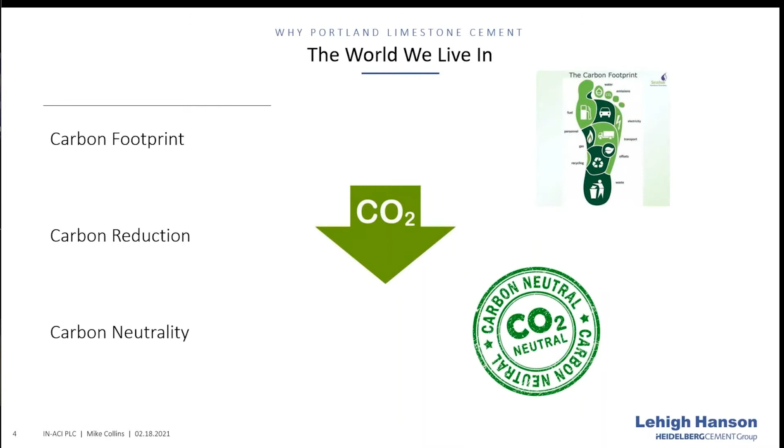We have to address it individually as people that live in this world, but we also have to address those kinds of things from a business standpoint, and it's going to become more prevalent as we work through our days. So I did a quick Google search this week and typed in carbon footprint. I got 5,050,000 hits in 0.42 seconds. Kind of blew me away.

Just a couple of examples from that search: the Wall Street Journal, airlines push to reduce carbon footprint with greener fuels. The BBC News, calculate the environmental footprint of your food, something I'm really not interested in doing today. And in the United States, we've got a new administration that promises in their first 100 days to jumpstart the whole climate change agenda.

So those things, carbon footprint, carbon neutrality, carbon reduction, they are a part of the world we live in. For us as a company, and when I say us, I'm talking about Lehigh Cement, but also as an industry, a way for us to begin to get our hands around carbon reduction is to let that be something that we use Portland Limestone Cement for.

I work for Lehigh, been with Lehigh almost 33 years. Lehigh is part of the Heidelberg Cement Group, and Heidelberg is very serious about this. From a 1990 baseline, they established that initially by 2030 we would see a 30% reduction corporately in our CO2 output. That has now been ramped up, or cut down, to 2025. And now the ultimate goal is by 2050 that we would be a carbon neutral company, realizing the vision of carbon neutral concrete at the latest by 2050.

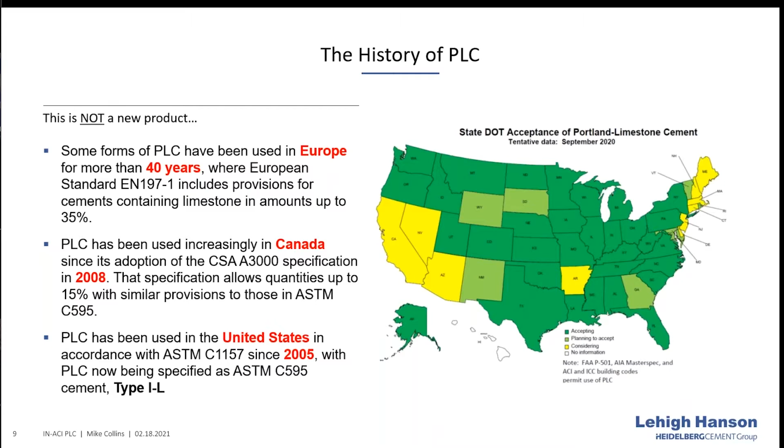Here on the right, you can see the map of state DOT acceptance of Portland Limestone Cement. If I'd thrown that map up there around 2012, it had a lot of yellow on it. More now you start to see states embrace this product because the flat out truth is it works. We're going to talk about that over the next several minutes.

As we talk about how it works, let's get into the mechanisms of PLC a bit. To understand how PLC works, we need to look at how it's made. As I briefly mentioned, Type IL is a blended cement, covered under ASTM C595 and AASHTO M240. Under those specifications, it's allowed 5 to 15% limestone by mass.

This next point is something I want to make sure everyone understands, because it's the question I routinely get. Portland Limestone Cement, our C595 cement, is very typically made from the very same clinker as the C150 cement from that same cement plant. The only difference is that PLC has about 6% roughly more limestone. A key is because it's a blended produced cement, it's designed for equivalent performance, and we're going to talk about that a bit.

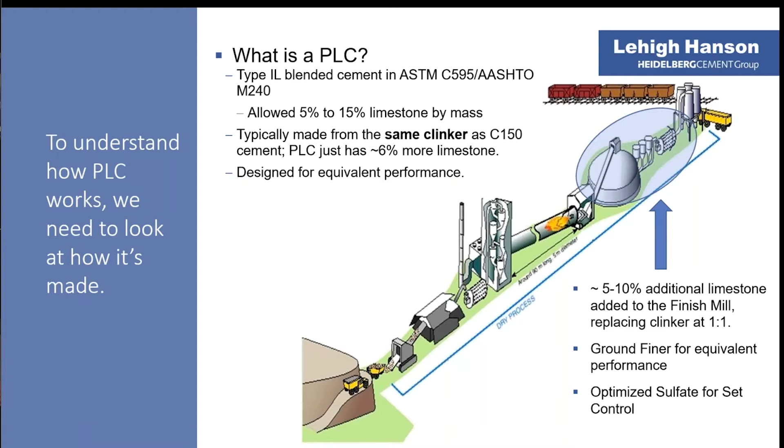And the cement is a part of that. The sulfate that the cement brings to the system is really tasked with controlling a lot of the reactions that take place once hydration begins. We're able to optimize the sulfate content on our end as a cement producer when we make that 595 cement.

And we're concrete guys for the most part, not always cement guys. So when I start thinking about things like particle size distribution, I look at aggregate gradation. If I have a gap in my aggregate gradation, I can often blend in a third aggregate, maybe a pea gravel, and that's going to increase workability or increase strength. It could reduce my water content, whatever it may be in that particular aggregate situation.

So some things that start to happen: we see an enhanced particle size distribution, so that cement typically would make a denser concrete. That leads to reduced porosity. One of the things I think limestone cement has battled over the years is that people think the limestone is inert, just kind of a filler material, and that's actually not correct.

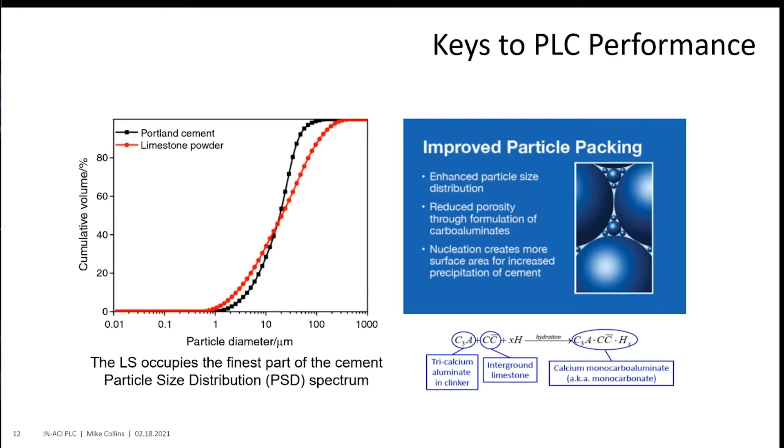So some advantages of PLC — what does PLC do for me? Well, the primary advantage is that it allows for a reduction in CO2, typically something up to 10%. Let's start to hang some numbers on that. In the United States, from the years 2012 to 2018, there were 4 million metric tons of PLC used in concrete.

What does that mean for us in terms of CO2 reduction? That was 325,600 metric tons of CO2 savings in that same time period.

So what does that mean? Well, that's equivalent to 70,344 passenger vehicles driven for a year — that's the equivalent CO2 output. So that would be the same as if we took 70,300 cars off the road. We've saved that much CO2.

That's enough CO2 that the energy used could have powered 37,500 homes for one year. And that's also the equivalent CO2 that's sequestered by 425,000 acres of U.S. forest for one year. I throw all those numbers at you because I think we need to hang some everyday data on this, to show why this is important.

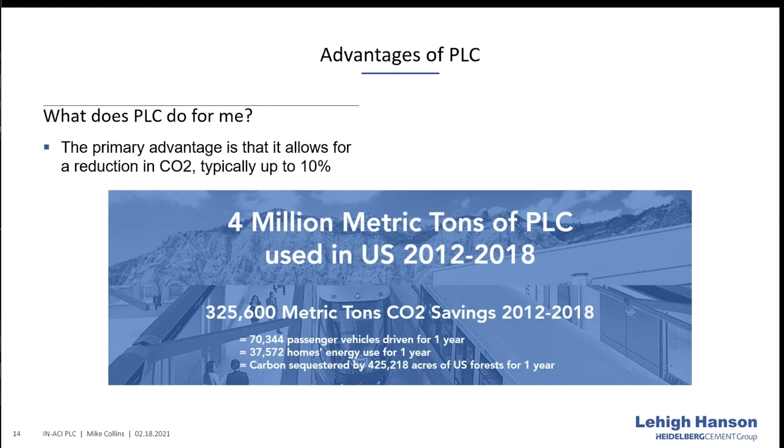4 million metric tons of PLC, that's across a 6-year period. We're way past that now. The whole PLC train has left the station, really, and you can start to see consumption pick up across the United States. And as it does, the CO2 savings continues to escalate as well. That's a good thing, that's what we want to see. And again, that's the primary advantage when we use Portland Limestone Cement.

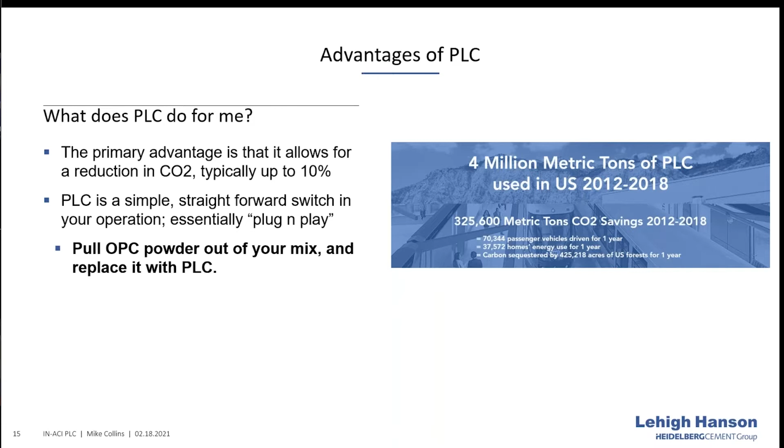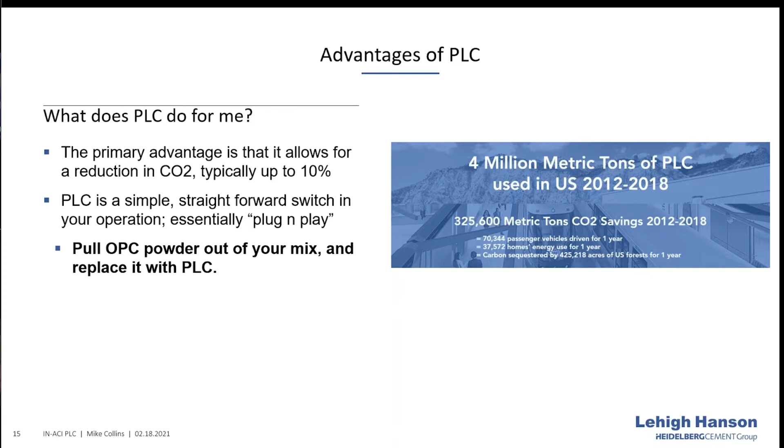But as a producer, there are some other good things that happen. So if you were to take PLC and use it at your operation, you're going to find it's a very simple, straightforward switch, essentially plug and play. What I mean is you pull your ordinary Portland cement powder out of your mix and replace it 1-to-1 with PLC, straight up. That's essentially all you have to do. At that point you've made the switch and you're going to see a carbon reduction in your concrete.

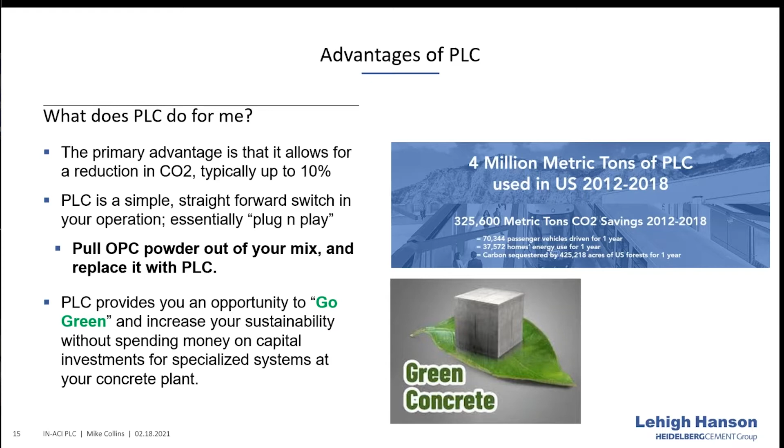So really what PLC does is provide you an opportunity to go green and increase your sustainability without spending money on capital investments for specialized systems at your concrete plant. That's huge, that's enormous. The environmental sustainability increase you see with PLC comes from doing something you're already doing—you have a cement at your plant that you put into your concrete. All that's required is to change powders, and you start seeing these kinds of metric ton CO2 savings that we demonstrated on the last slide.

Just want to throw this in here briefly—I don't want to get into it too much because we could have a whole separate talk on EPDs. If you've not heard of EPDs, I'd suggest you will, probably sooner rather than later. So let's define that: an EPD is a transparent, verified report used to communicate the environmental impacts, such as resource use, energy, or emissions, associated with the manufacture or production of construction materials. On your right is that environmental product declaration—people liken it to the nutrition label on the side of your Coke can. Essentially, that's what it is.

What I'd suggest is that the main area we're looking at here is on the far left—that's the Type 1L, with a global warming potential of 679 kilograms of CO2. Beside that is the Type 1 at 746, and the Type 3 at 767. Again, using that Type 1L cement allows us a reduction in global warming potential, and that's something that's going to become more and more significant, not only environmentally in everyday sustainability, but also in terms of our business operations.

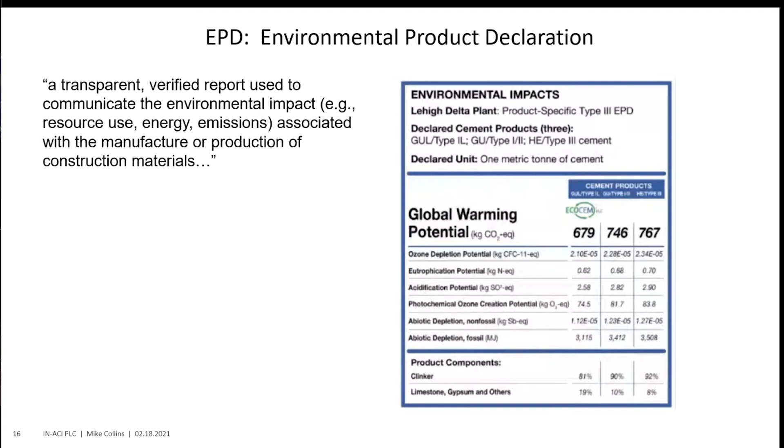I can tell you that in the Pacific Northwest right now, there are places where if you make a submittal and you do not include an EPD with that submittal, your submittal will be rejected. So this is something that, as it comes across the country and begins to affect our particular area, we're going to become more and more familiar with.

So what are the benefits of these EPDs? They provide verifiable and transparent information on life cycle environmental impact data for materials or products. I think the key word there is transparent information. People are being honest about things—we've got to be honest about how things are made, the ingredients in those things, whether it's cement or concrete or whatever, because people are starting to do meaningful evaluations, life cycle assessments, where we have to know what goes into a product to determine its life cycle and eventual benefit. So again, we're identifying areas for environmental performance improvement and encouraging industry efficiency.

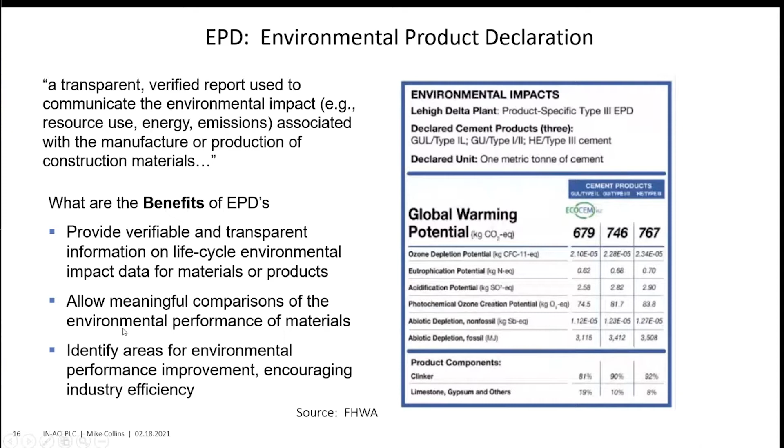So I've got a buddy on the call, Scott Kelly. Scott Kelly is the Lehigh Technical Services Manager for our South region, and he did a survey recently. In Scott's area, they've been selling and using Portland Limestone Cement for about 10 years now, so he's got customers with experience with this product. He asked them some questions, and I captured a few of those for us to discuss today.

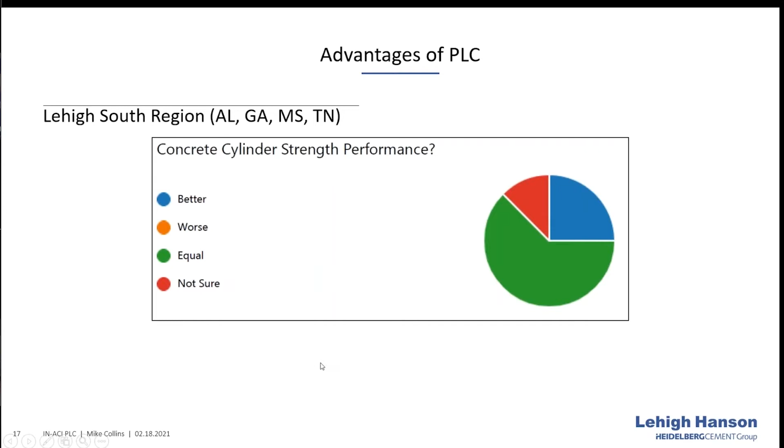The first one is concrete cylinder strength performance—is it better, worse, equal, or not sure? You can see about two-thirds of that group says it's equal, a quarter says it's better, and the other folks aren't sure—they may be in a different kind of environment where they're not looking at cylinder strengths. For concrete durability performance, again the vast majority, 75%, says equal, with 25% not sure.

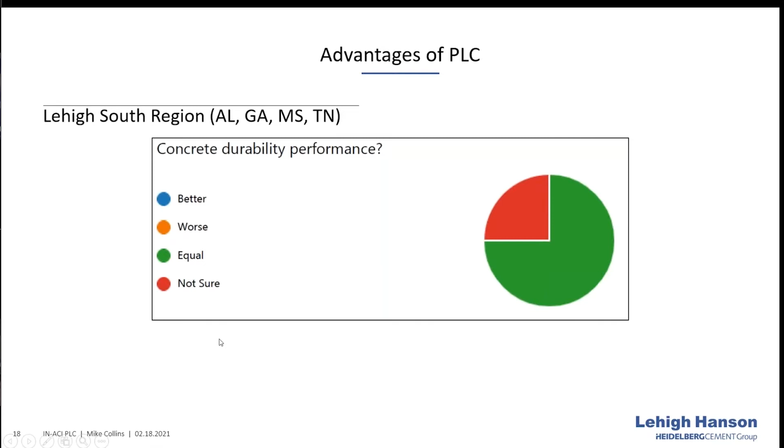Marketability of being a more environmentally responsible, or greener, product - is that something that's helpful? Half of those people said yes, it makes them a better company. And again, about a third said it's at least equal.

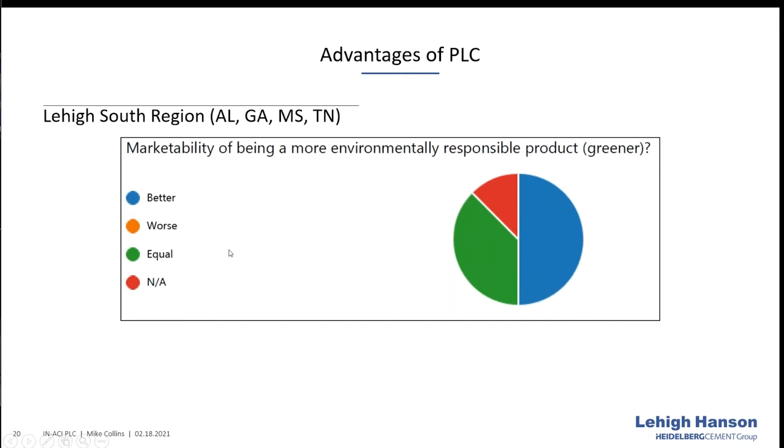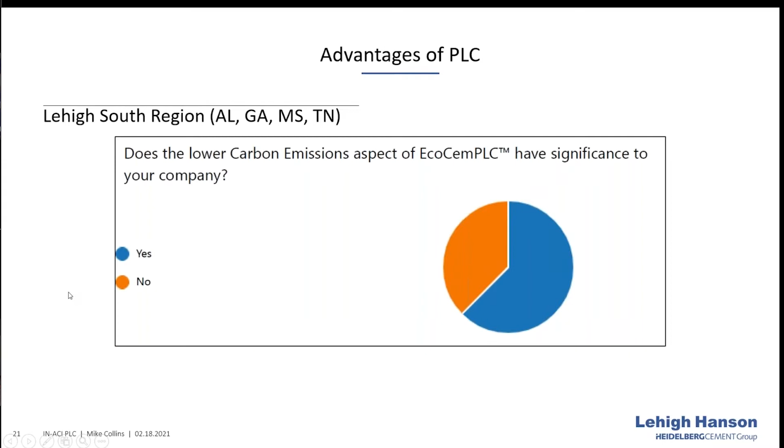And lastly, does the lower carbon emissions aspect of EcoCemPLC, which is Lehigh's trade name for our Portland Limestone Cement, have significance to your company? Again, two-thirds say yes, it does have significance. These are folks that have used this product for over 10 years now, and they're starting to see not only the performance benefits, but also the benefits in terms of the green aspect and marketability as they enhance their sustainability.

So I kind of flew through all that because I'm a numbers guy, and I want to get into some nuts and bolts about PLC. All that sounds great - I think we'd all say we want to be interested in the environment, to do things that leave our world a better place for our children and so on. But at the end of the day, does Portland Limestone Cement work in concrete? Let's take a look at that.

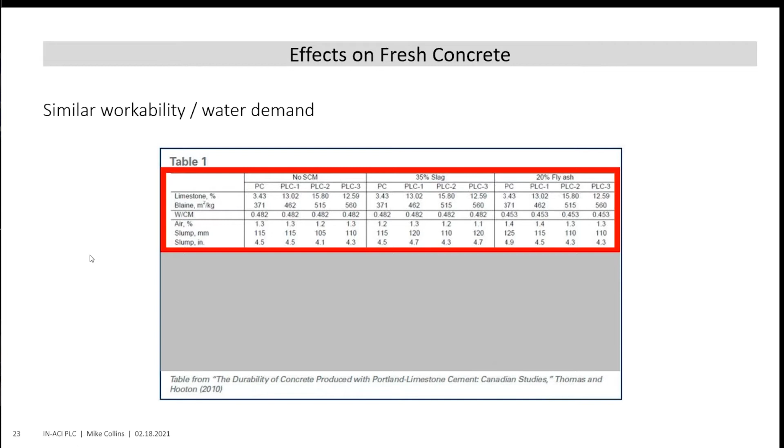This is a slide from a paper that Mike Thomas and Doug Hooton did in 2010. What this shows is that with different percentages of limestone addition, you see similar workability and similar water demand. There's another slide very similar to that, and it demonstrates similar strength development.

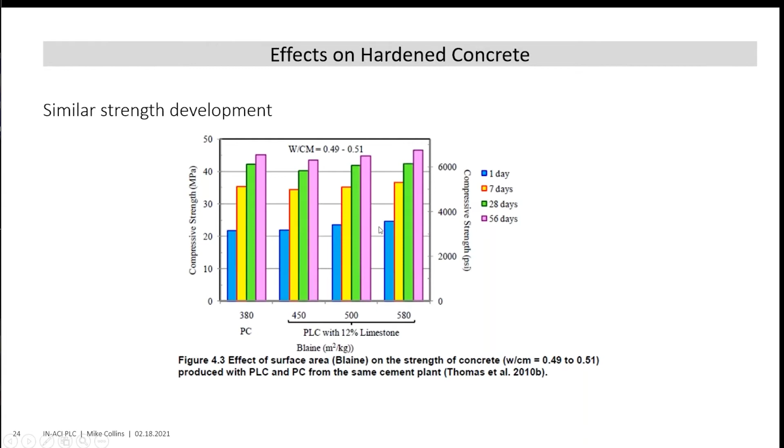And I just got to stop at this point, because I've given this talk tons of times. You guys may have sat in some PLC talks and seen these same slides over and over - these strength slides get run out all the time at all kinds of seminars, webinars, and presentations. I just had the thought: what if we transition from industry data to our data? How would our data match up to what we've learned from the industry?

And when I say our data, I have to be honest and say I'm talking about Lehigh data, because we have a fantastic concrete laboratory in Mitchell, Indiana. We said we don't want to rely on industry information when I talk about this kind of stuff - let's put our own meat on these bones. So I'm going to share some real life numbers from cements we've made in the Indiana market and even in Mason City, Iowa.

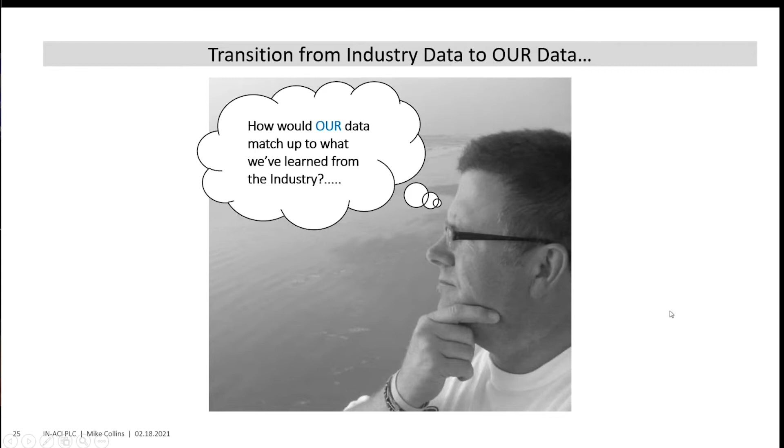This is an actual test report from EcoCemPLC ground at our Logansport, Indiana plant. I know that's hugely overwhelming - there's a ton of numbers and all kinds of information on there. We're going to break this down. I just want you to see how much information we squeezed out of a trial grind that was done last year at our Logansport plant, and we're going to look at all this a little closer.

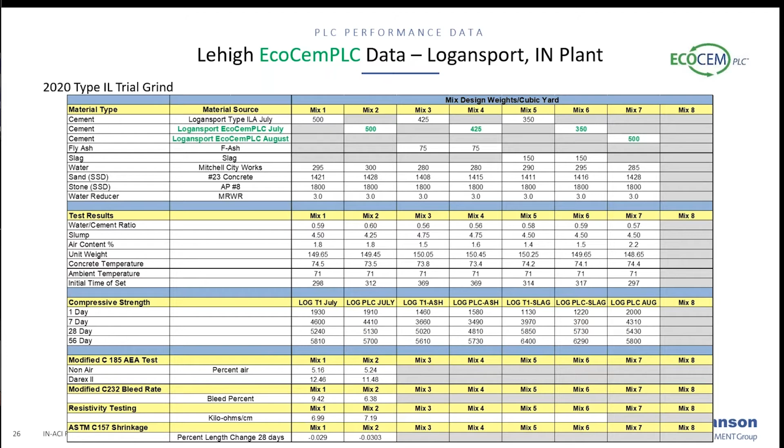The key is we have looked at this seven ways from Sunday. Because we've really done our due diligence, I can tell you that when you use a PLC, you are going to see like-for-like performance or better in almost every measurable category. That's been the story we've seen. So let's dive in and take a look at this.

If we look at strength data - this is kind of busy, so I want to hide some of this. On the far left is our Logansport Type 1 sample from July, just our regular monthly sample from that plant. We also did our PLC trial grind in July. We put those two powders in the same mix design, same aggregates, same chemicals, using a mid-range water reducer at 3 ounces per 100 weight dose, and this is what we got. We said, okay, that's really pretty close.

That's kind of the like-for-like that we're looking at. So let's verify it. We did a second trial grind in August, and that's on the very far right.

When you look at that strength data, again, right in line with where our Type 1 is, and I would even say a little better in some categories, especially 28 and 56 days. And if you look at the 1-day break on the PLC in August, it's the highest of the three.

So again, like-for-like performance or better. I know that some of you guys rarely would use just an OPC mix. So what happens when we look at fly ash?

We took a fly ash that would be common in the northern part of the state, and mixed that with the Logansport Type 1, and also mixed it with the Logansport PLC ground in July. Again, like-for-like or better, very equivalent strength performance.

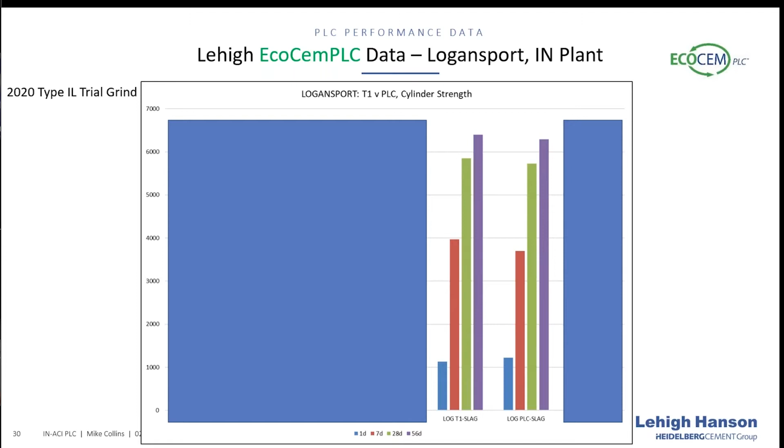So from a strength perspective, comparing similar mixes, what you're seeing is that the limestone cement performs equivalently to the C150 Type 1 cement. That wasn't a surprise to us initially because we'd looked at this industry data, but what was needed was confirmation.

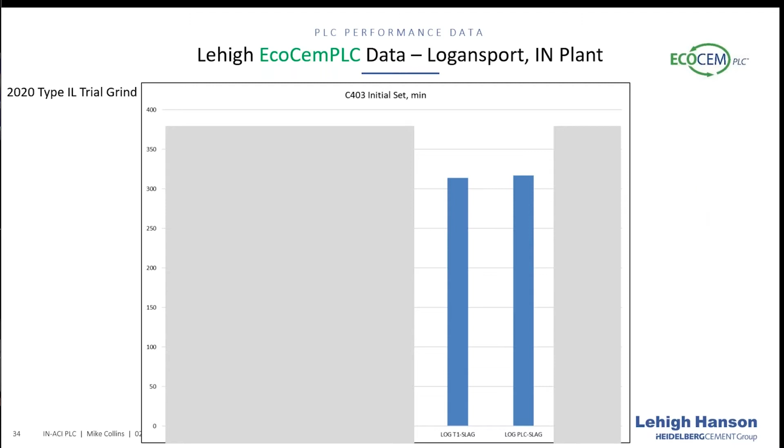So let's look at some of the other things we did. To measure air performance, one of the things we do is a test called C185. If you see a mill test, we talked about this in December — the data you're getting on that air content, that's not concrete air.

That's not entrained air from concrete. That is entrapped air measured in a cup of mortar, a 400 milliliter brass cup. And what we've been doing for years in our lab is take that cup and repeat that mix, adding a very minute dose of air entraining admixture.

Then we just look and see what the difference is. Does it generate air? Does it generate air predictably? Things like that. Also, it's a great test to use for fly ash — personally I think better than the foam index test, but that's another talk.

What we saw: mix 1 was the July Type 1, mix 2 was the July PLC, and with no air entraining admixture, pretty much equivalent — 5.2, or 5.16 to 5.24. We did see about 1% less with the air entraining admixture.

Again, that's something we've seen a few different times in the field, not unsuspected or unsurprising whenever you consider the fact that the PLC is ground finer, and typically that just requires a very small adjustment in air entrainment once you make that — then it kind of locks in and is steady and you don't have to worry about it anymore.

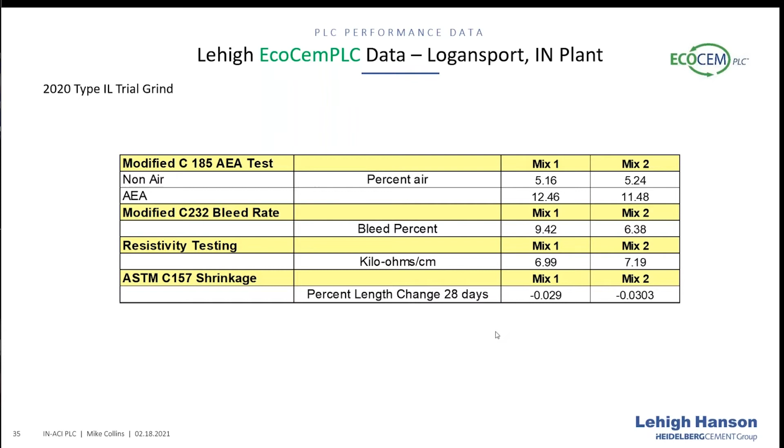So we didn't stop there. Our lab is pretty cool - we have a room in our lab where we can set the temperature from about 40 degrees all the way up to 100, so it allows us to replicate outdoor conditions.

And so we said, hey, how does this cement perform in cold weather? We set the room down at 45 degrees and went in and did some mixes, just looking at what would be an everyday, maybe interior slab mix, and just ran the time of set at cold temperatures.

Essentially what we found is that the PLC from Logansport set 2 minutes quicker than the equivalent type 1. With the addition of a non-chloride accelerator, it set almost an hour quicker, 53 minutes. And from the plain Portland limestone cement to the accelerated limestone cement, there was 218 minutes difference.

So all of this fits with what the industry would tell you in terms of time of set. It was good to see that temperature didn't have an effect, because we saw very equivalent times of set with untreated samples back in our room temperature tests. Now we can confirm that at 45 degrees, we're seeing almost exactly the same, even a little quicker set with the limestone cement. So the data we wanted to see is what we saw.

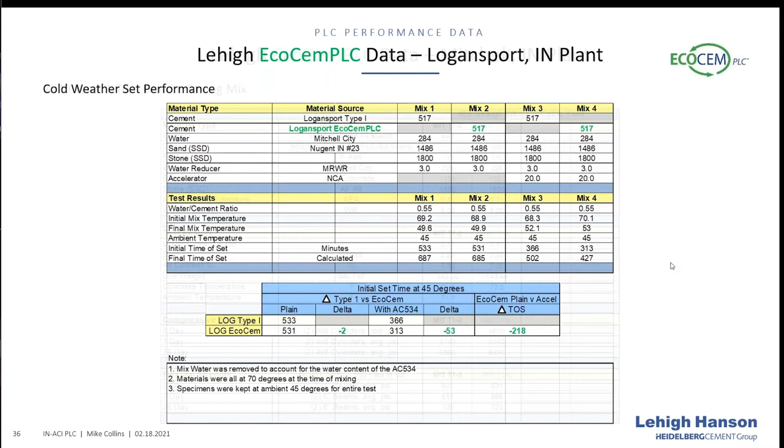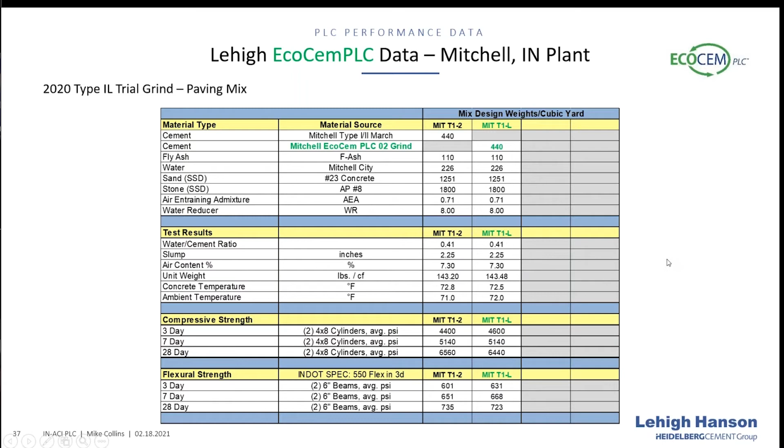Another question we're asked is, what about sulfate resistance? Our very first trial grind at our speed plant was in April of 2019, and we sent some of that material off that year for C1012 testing. As you know, that can run out a bit, so we're carrying that all the way out for 18 months.

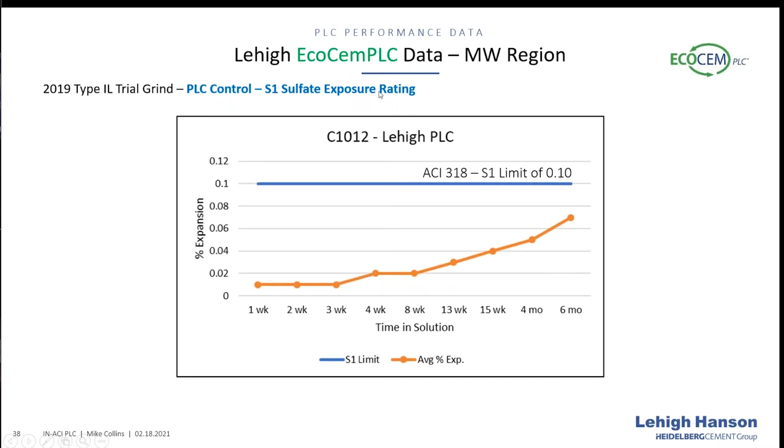Some early data that has come back is that the PLC control with no SCM has met S1 sulfate exposure rating. That shouldn't surprise us, right? Because the clinker is the same - the clinker chemistry is the same, and Speed's type 1-2 typically without an SCM meets S1 sulfate exposure rating on its own. So we see that carry over to the PLC using that same clinker, and the PLC control reaches S1 sulfate exposure rating just fine.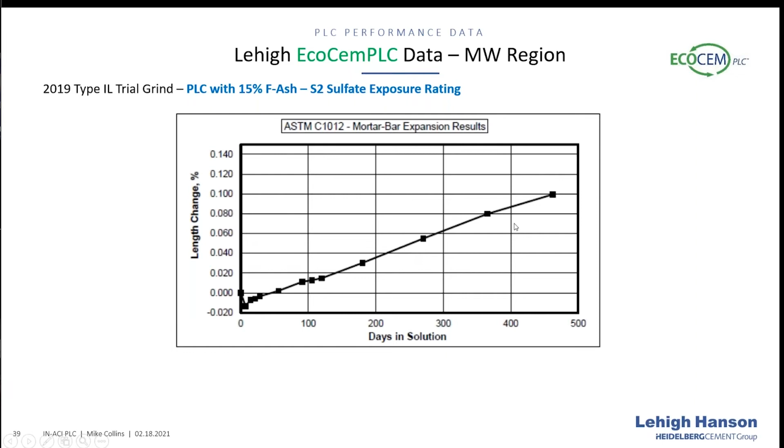When that speed PLC is used with 15% F-ash, it easily met S2 sulfate exposure rating. And when we put that in a mix with 30% slag, it really starts to flatten out - it's already met S2 sulfate exposure, and I would expect that to easily reach S3 as well. We're going to carry that out to the 18-month mark, but I don't expect it to do anything crazy and not make S3 at that point.

From some early testing, what we're seeing is that the limestone cement has no adverse reactions to sulfate. It performs very typically as compared to the C150 cement at the plant where it was produced. So we went ahead and sent all 4 PLCs from the Midwest region out for 1012 testing as well.

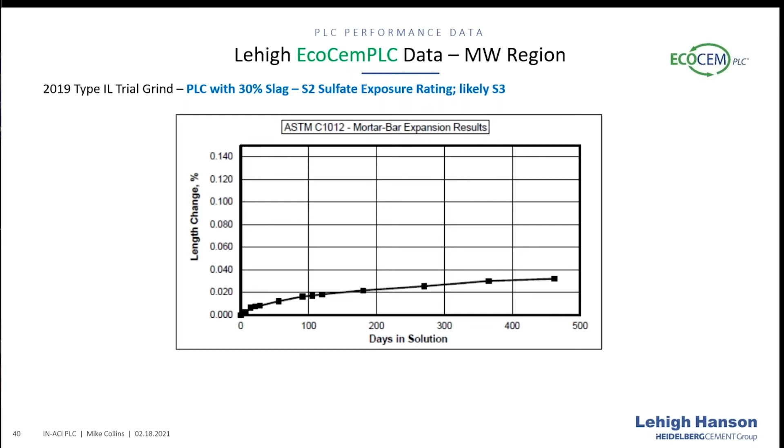Color - so you are adding more limestone, right? And limestone's typically much whiter than clinker is. So under glass, if you were to look at the 2 powders, the PLC would be lighter. If you've been to our concrete school, we show you a type 1 cement under glass versus a type 3. From the same plant, the type 3 will always be lighter, because it has more gypsum in it. So it shouldn't shock us then that if we put a type 1-2 beside a type 1L from the same plant under glass, that type 1L is going to be lighter.

And again, that's because it has more of the whiter limestone included in it. But powder is not the end game for us. It's where does this end in concrete?

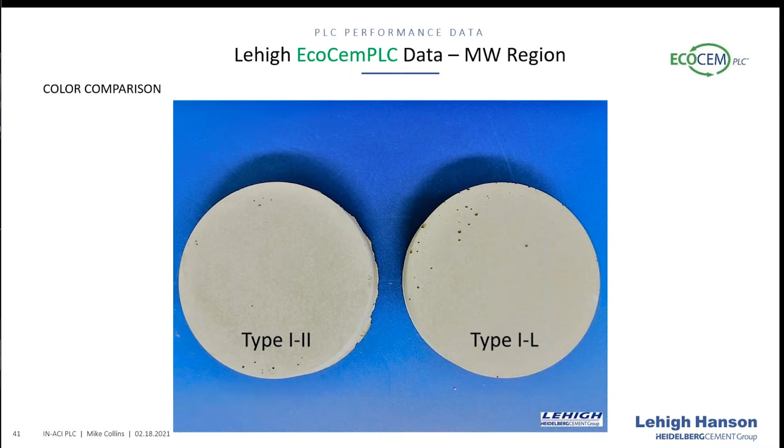So what we did, our color lab at Speed took 3 parts silica sand and blended that with our Portland Limestone Cement and the type 1-2, and made a mortar. They shook the air out of those and took some pictures. The proof's in the picture because it's really hard to tell the difference between those 2 pucks. Very similar color. What we have found is that you can tell a difference in the powder, but when you put concrete sand with that, color kind of washes out. It's really not much of an issue going forward.

So what about admixture efficiencies, things like slump retention? We took the Mitchell cement and looked at that, looking at a different admixture dose. We did untreated, 0 ounce per hundredweight dose, 3 ounce, 5 ounce dose of a water reducer. And we did micro concrete, where we took the mini slump readings and carried that slump loss out for an hour, and then just looked at how much slump was lost.

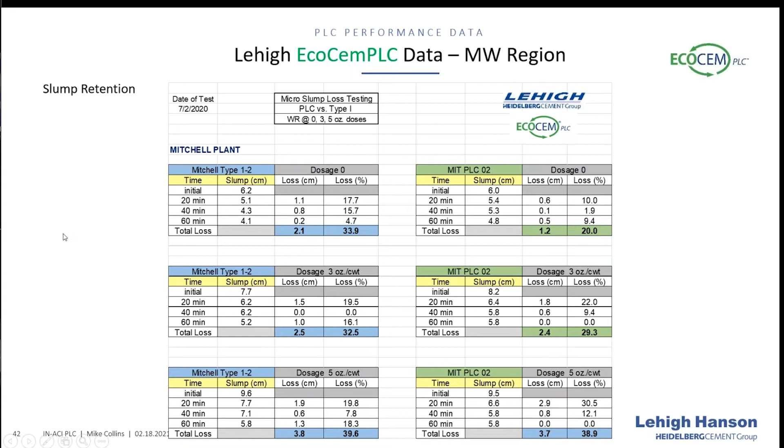So we found a couple of things. In every case, the PLC lost less slump, and in some cases generated more slump initially. So again, very positive return there on that test investment. Slump retention is again at least equal, if not improved. Something that we've already seen begin to pay benefits on a couple of different projects.

Okay, so let's talk about some data and some projects and kind of where we can take some of this data and make it come to life.

So we have a customer in our North Central region that was interested in looking at the trial grind from our Mason City, Iowa plant, where we made a type 1L product late last summer. We just sent them the powder and they sent us some test results. Very nice of them to do that. And what they found again was things that we have seen in the Mitchell lab.

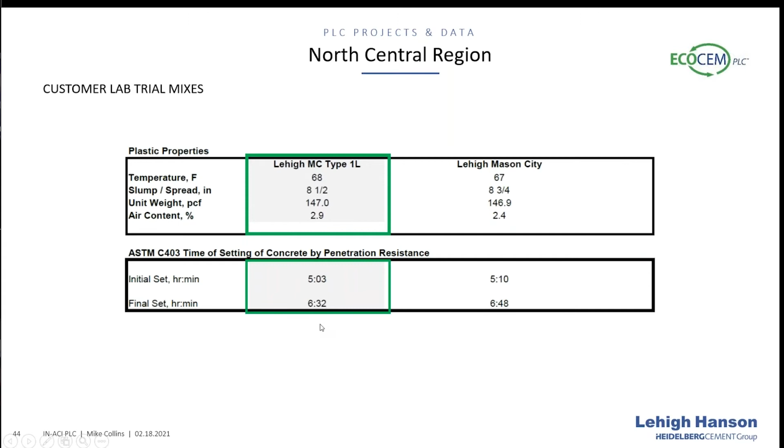So in terms of time of set, just a hair faster on the initial set, and just about 16 minutes faster on the final set. So again, things that we've seen out of the Midwest, the Central Region cements, we're starting to see again out of those North Central Region cements.

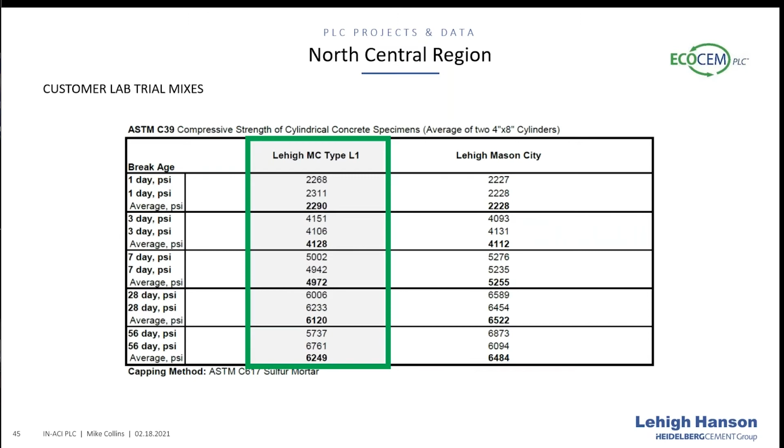In terms of strengths, the same kind of properties continue to bear out, where we're seeing very equivalent like-for-like strength performance, well within standard deviation. And the report that we got back from our customer after they did their trial mixes was that they were very pleased that the results were so similar. So this is a good report where we didn't have our hands in this testing—this is a customer doing their own evaluation for their own purposes.

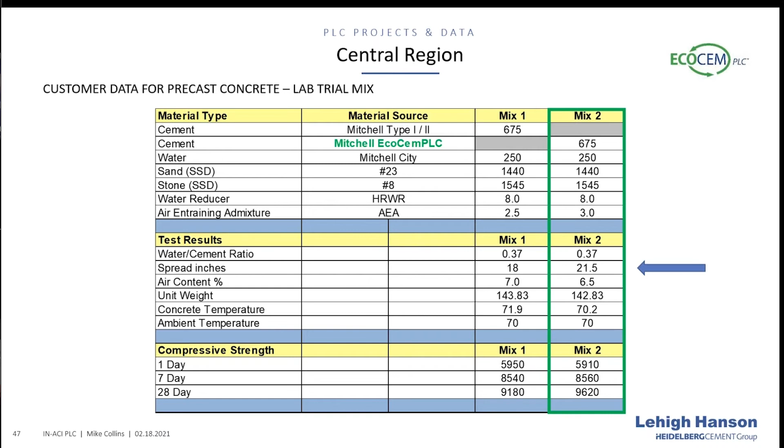But at the higher spread, they've got some fantastic results on strength: 5910 in 1 day, all the way up to 9620 in 28 days. So that's kind of an ongoing project where we're going to help them optimize their mix now with the inclusion of the EcoCemPLC.

A couple of case studies to take a look at—we talked about this in December very briefly, but I wanted to get into it a little deeper. At some point, if you have a question about this, we've got Scott Kelly on the call again, who was involved with this project.

At our Leeds, Alabama plant, it's a Lehigh cement plant, there was a silo constructed back in 2010, I believe. This is a 3-chamber silo, about 20,000 metric ton capacity. This was a slip form project. And the good news here is that this was an opportunity to use PLC, not only just PLC, but a PLC slag combination for durability.

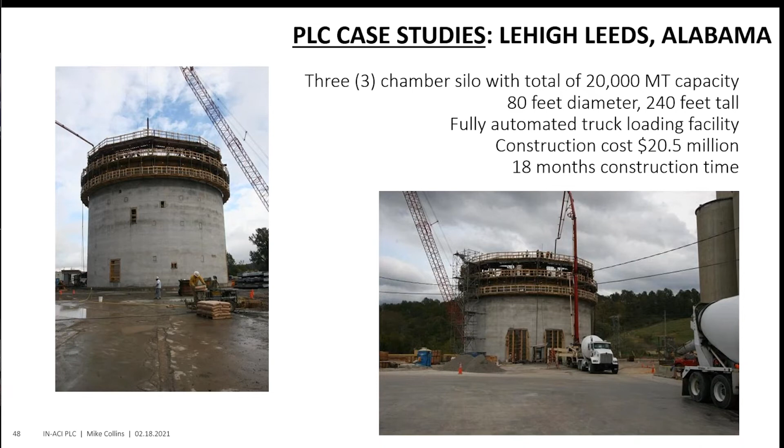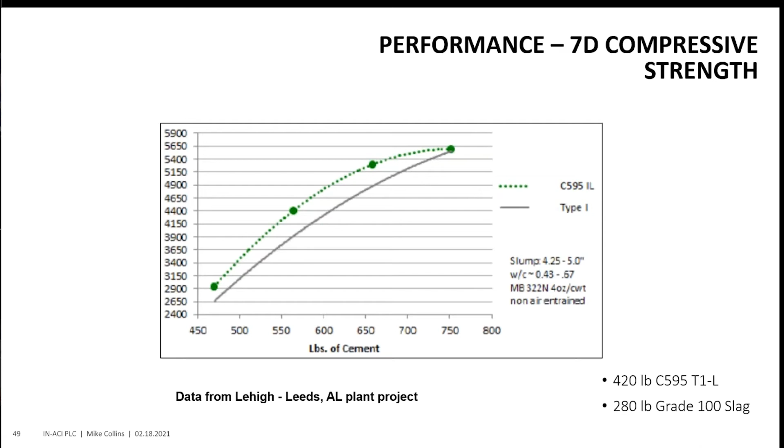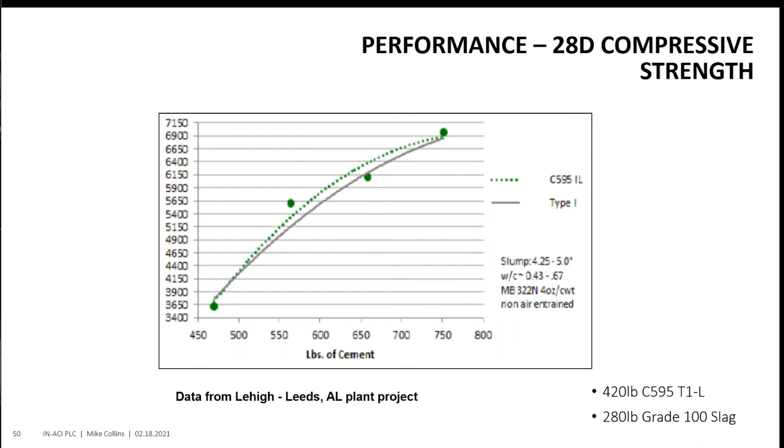And so here's how some of the data turned out. When we look at the C595 data, at different cement contents, the 595 data exceeded the type 1 performance. This was 420 pounds of type 1L with 280 pounds of grade 100 slag. The 28-day compressive strength pretty much saw that same trend hold true, with the PLC breaks above the type 1 breaks.

And so some conclusions that were made after this project was over: you saw the slag cement work very well with the type 1L Portland Limestone Cement. Current admixtures that were available for that project worked extremely well and predictably. It works well in complex concrete applications, produced a very low Coulomb durable concrete, and actually required less hydraulic pressure to continuously slip that silo.

Something that's of interest as we talk about sustainability is that reduction in clinker factor. On this particular project, there was a 52% reduction in clinker factor, which was a combination of using the type 1L cement and the slag cement that actually allowed a clinker reduction. So this was a very environmentally sustainable mix that actually had outstanding performance in excess of what would have been achieved with just a type 1 cement.

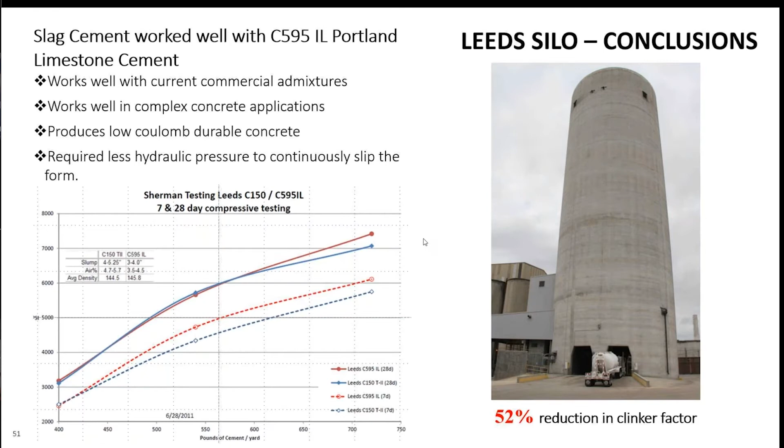Talked about this again briefly in December, but it's worth mentioning again. We did an I-65 patching project where Lehigh worked with IMI on this project back in September. This was on Interstate 65 near Columbus, about 284 yards of patching and 68 yards of flowable fill. There was nothing unusual in this mix—pretty typical patching mix—had 752 pounds of Portland limestone cement.

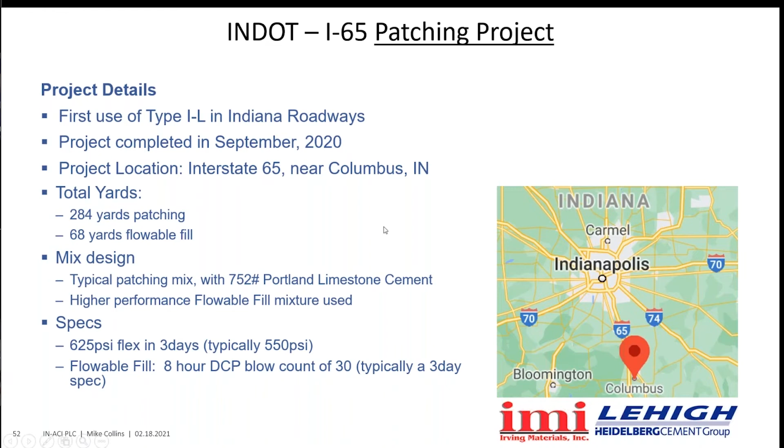It was a higher performance flowable fill that was used. Some specs that were a little interesting: 625 PSI flex in 3 days for the patching, and the flowable fill had an 8-hour blow count of 30, and typically you might see that as a 3-day count. So just to take a look at that, the flowable fill mix actually performed very well.

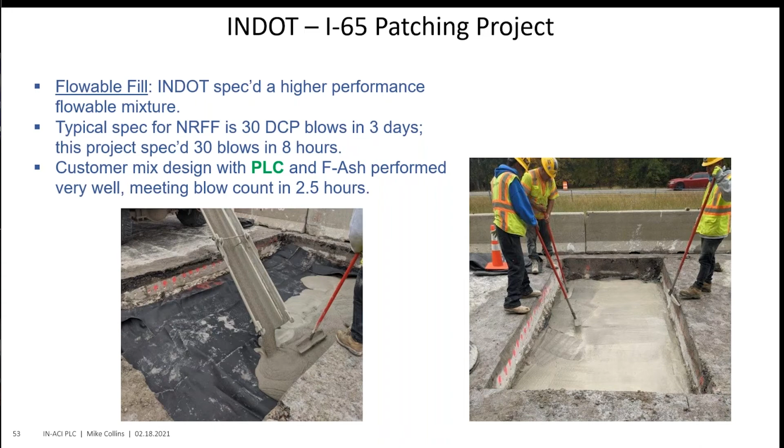One of the things that kept this project going in a real timely fashion was that IMI was allowing up to 8 hours for this material to set before they could start the patching. This flowable fill, which was a combination of PLC and F-Ash, actually reached blow count again in 2.5 hours and allowed that project to speed up a bit. You can see in a couple of slides what that meant.

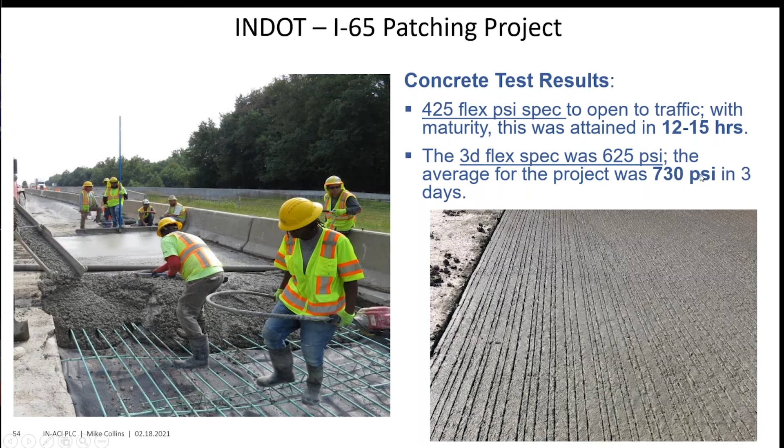I love that picture—you get a good idea of just what kind of creaminess comes to the top there when that concrete's vibrated.

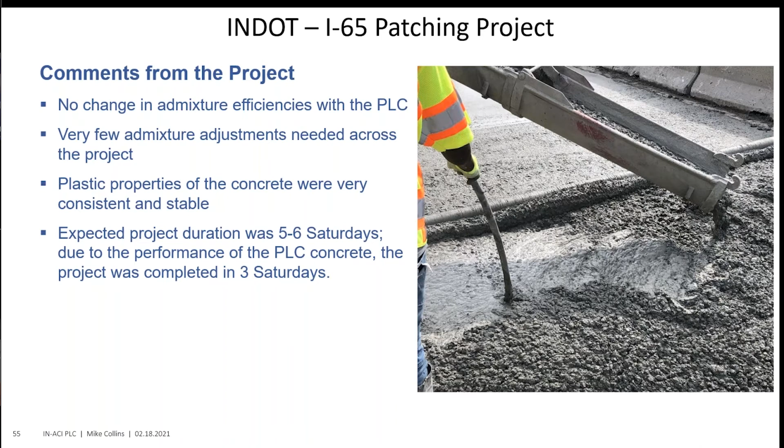Again, some of the comments from that project: no change in admixture efficiencies with the PLC. That's huge—again, they just pulled one powder out of a typical patching mix, put in the PLC, did have to make a very minor adjustment initially in air content. Once they got that in spec, they just ran with that dosage the entire project. Plastic properties of the concrete were very consistent, very stable, and because of the performance, they were able to cut down on the length of the project.

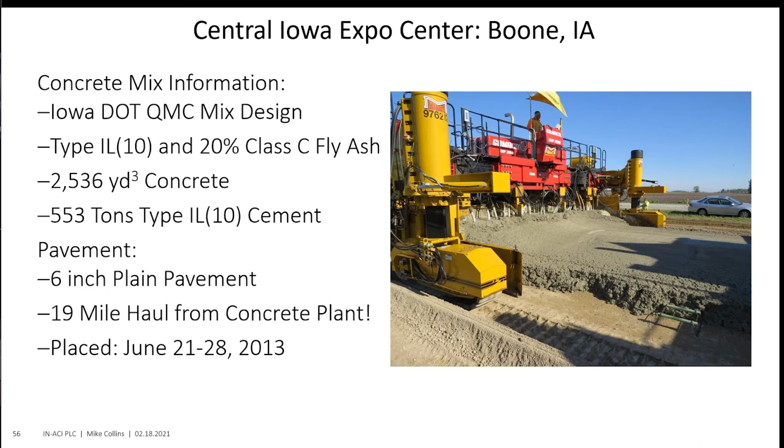An older paving project out in Iowa. This was a project looking at 2,536 yards of concrete that used a mix containing 553 tons of type 1L cement, with a 20% fly ash composition, for 6-inch pavement. The interesting thing, if you remember we talked about slump retention and how PLC tends to extend that, there was a 19-mile haul from the concrete plant to the actual project site.

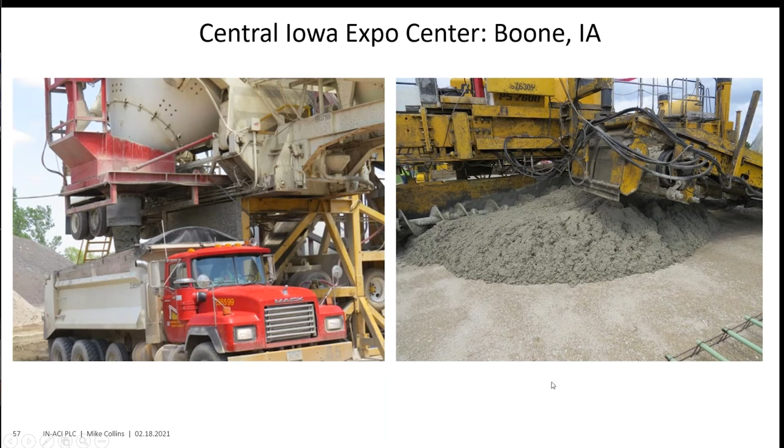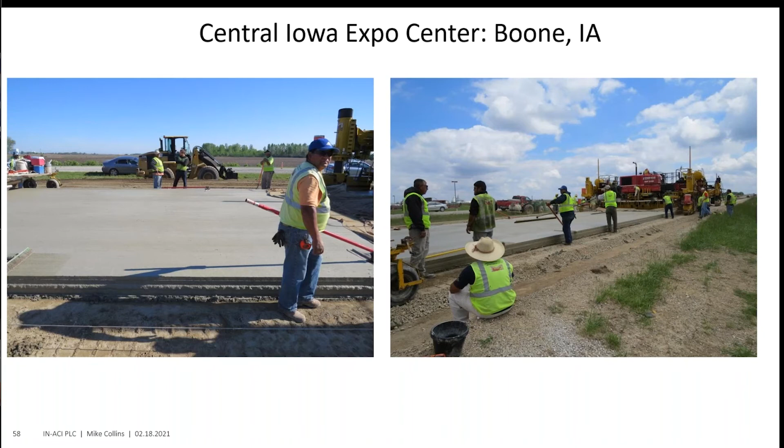So here's a couple of pictures from that project at the Central Iowa Expo Center. You can see now once that's went through the paver, what we talked about in terms of the finishability of the PLC because of those limestone fines, how the surface itself and the edges just really stand well, holds its edge. Everything just looks fantastic. Very well received and a successful project from an Iowa paving job.

So what if you want to specify PLC on a project? There's some tips for you available. What kind of specifications cover PLC?

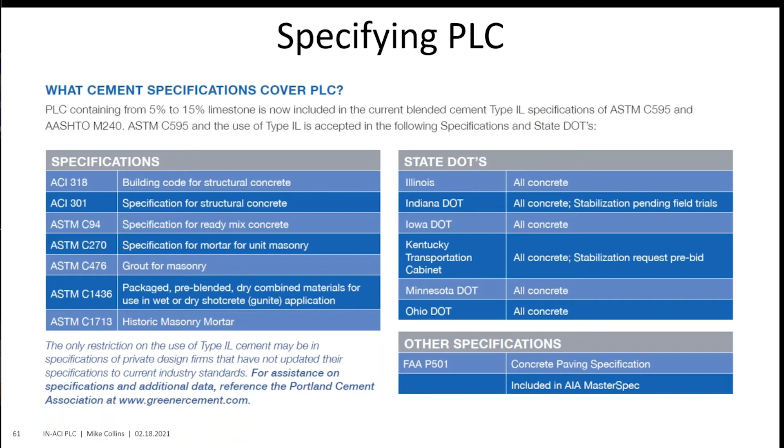Well, first off, understand that in terms of local DOTs, Illinois, Indiana, Iowa, Kentucky, Minnesota, Ohio all allow use of type 1L cement on concrete projects. But ACI 318, 301, for instance, building codes and structural concrete specifications, all accept type 1L in those specifications. So this isn't new. We have to remember this isn't a new product. It's something that's been in the marketplace for a while. It's just making its way into our area.

So here's part of a sheet that the Portland Cement Association provides to help you get PLC specified on a project. And these are their words: specifying PLC for use in concrete is not complicated. PLC is a direct replacement for ordinary Portland cement, so it only requires one change to project specifications, and that change would be to refer to ASTM C595 type 1L instead of ASTM C150 type 1 Portland cement. According to the PCA, it's that simple.

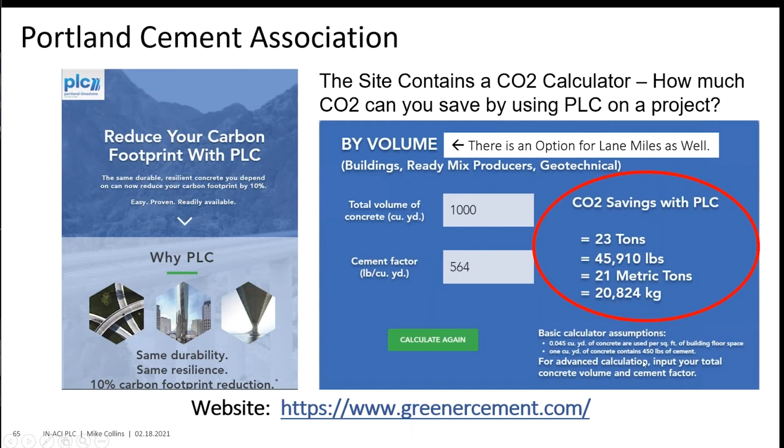I would point out there's also an option to select that for lane miles as well, so you can calculate the CO2 savings when it comes to paving. That's one of the tabs on that website, greenercement.com. There's also links to several excellent PLC fact sheets, case studies, things like that.

But for architects, engineers, specifiers, there's an awesome page called How to Specify PLC. You can go to this site, explore that link, and it gives a lot of great information. It actually goes into a lot of detail on specification language, what that might look like for different projects and uses for the PLC product.

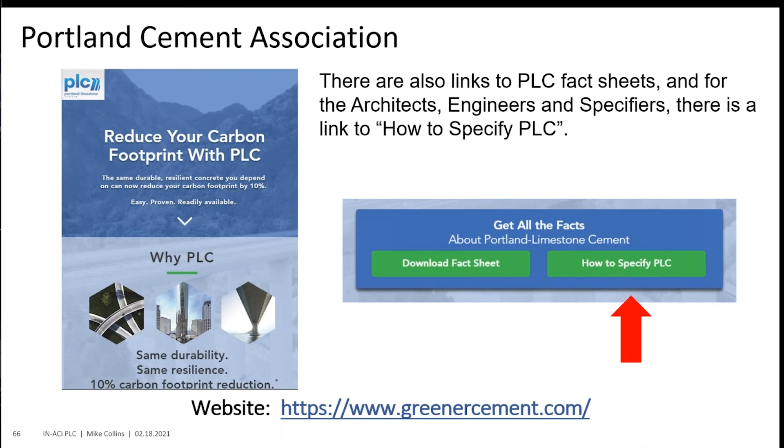So a fantastic resource, both of those available for free. If you're a Tyler Ley fan, which probably most of us are, he's a fan of Indiana ACI as well. He has produced a short clip called PLC, A Greener Cement, sponsored by the Portland Cement Association to help push the greenercement.com website. I'd encourage you to check Tyler out. If you've ever heard him speak, you know he's one of the most engaging speakers in our industry.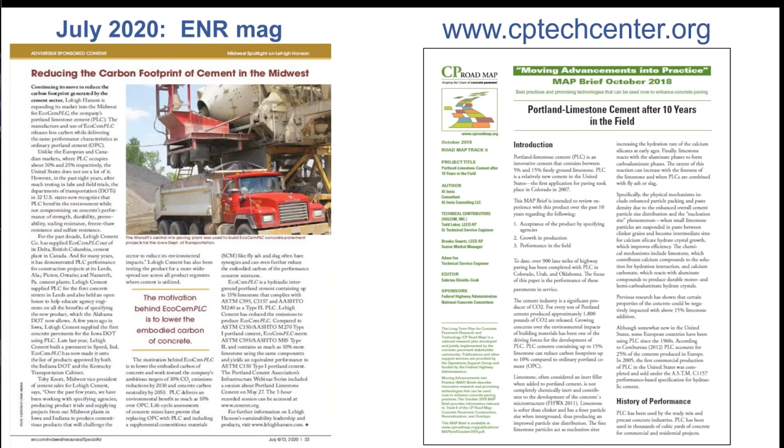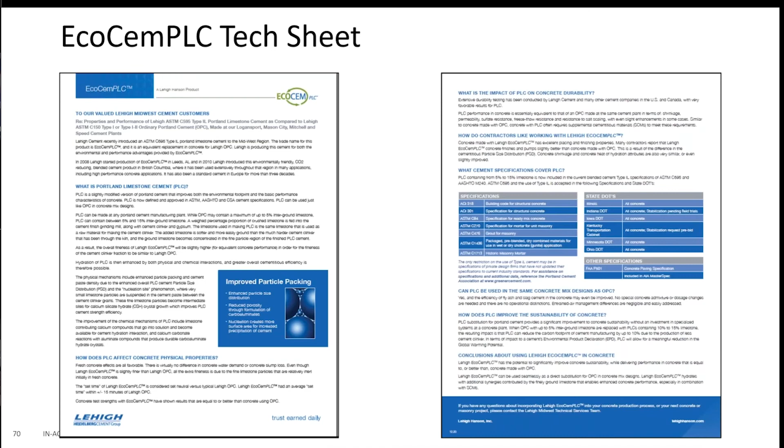Okay, coming down the home stretch here, we've put together as a company a tech sheet for our EcoCemPLC product. This is available from your Lehigh sales group and tech service group, so we can certainly get that in your hands if you have any questions. What I wanted to do now is share a customer testimony with you — this is a ready-mix producer in Philadelphia, and they made a video that's actually pretty fantastic about how they are making a difference with Portland Limestone Cement.

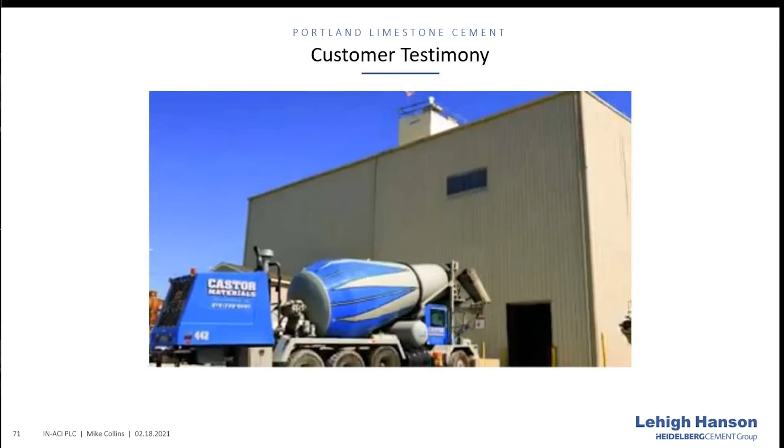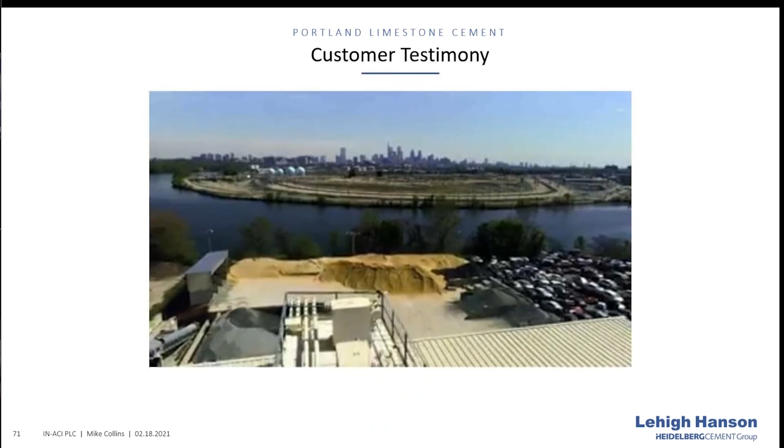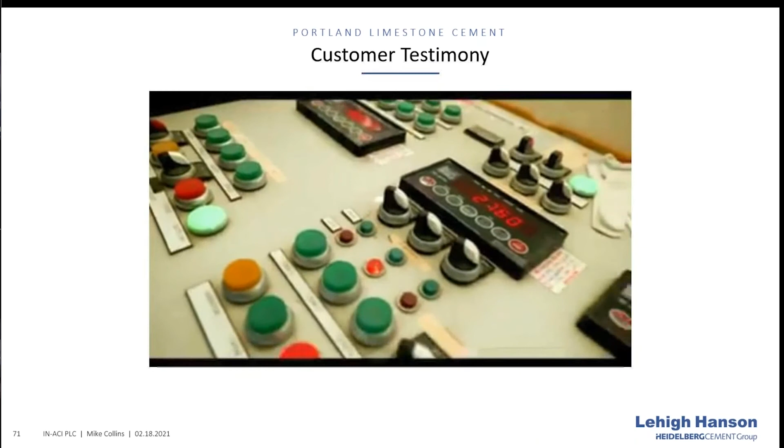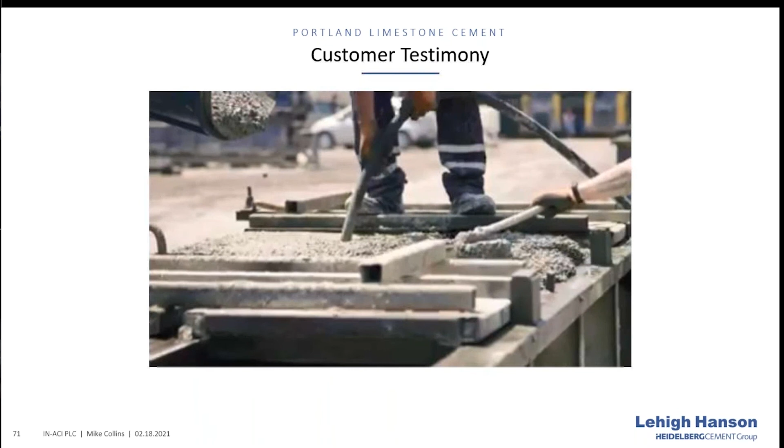Castor Materials was started in 2004. We started very small with one plant, and we've now grown into three plants. We're extremely proud to be based here in Philadelphia. Everybody comes to work every morning, puts in 110%, and cares about their job. Our biggest thing is quality — it don't leave here unless it's right. Want to make sure slump is good, strength is good, air is good. Sidewalk is totally different than foundation of the building, than columns of the building, the beams of the building, the slabs of the building — totally different. They care about what the next day brings, and they're forward-thinking people that want to help us grow.

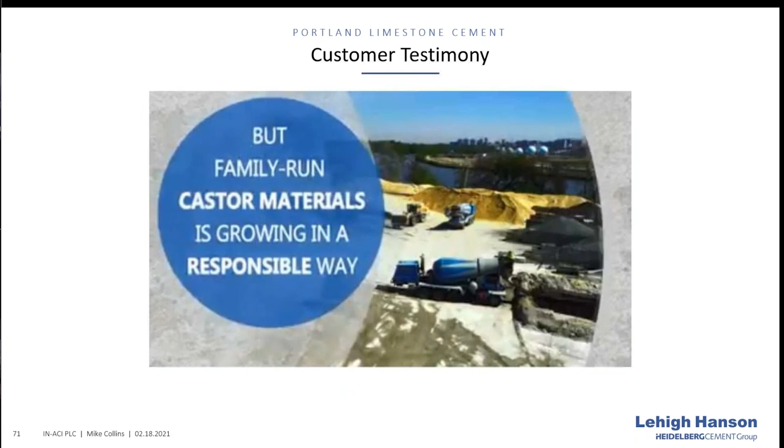So our new product is EcoCemPLC. It's an environmentally friendly Type IL cement. It's been a really good initiative that we're really proud to be behind this year. It's the right thing to do. The product is very much the same — if you can use the same product doing the same thing, but know that you're saving the environment, it's just a win-win. This is a huge initiative for our company and for the industry itself. If we were to change or alter 5 million tons of Portland cement to produce Portland Limestone Cement, that would be the equivalent of taking over 100,000 cars off the road annually in the United States. It's a significant impact.

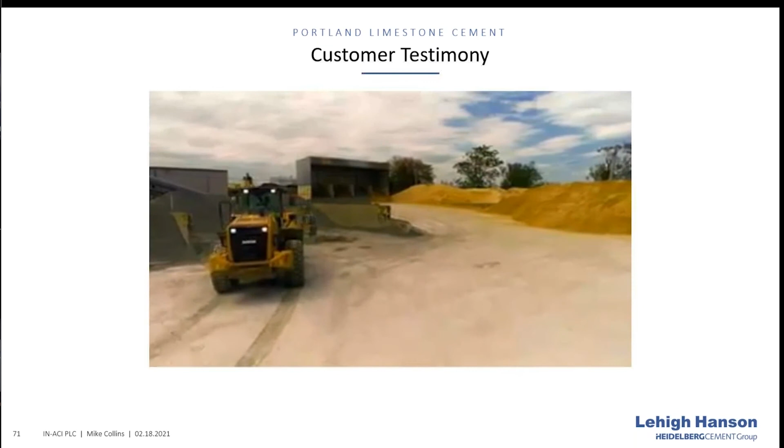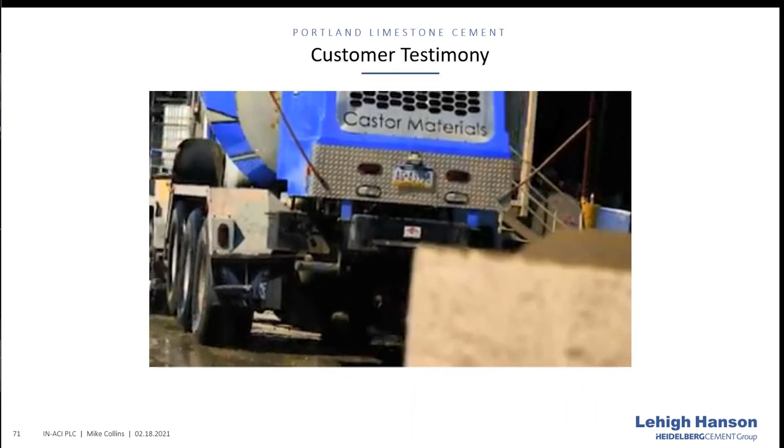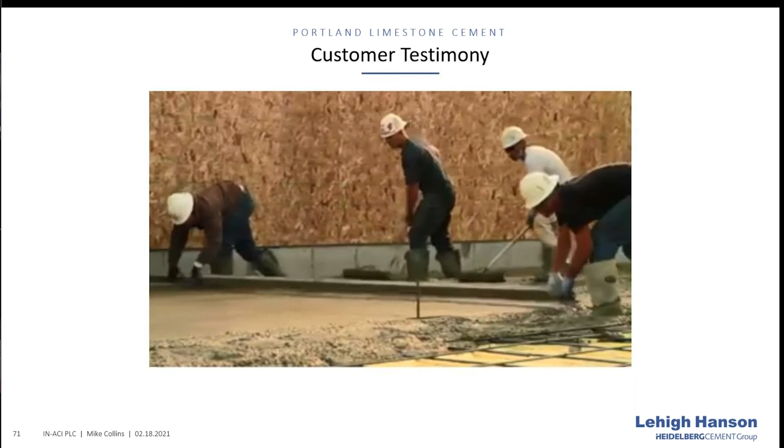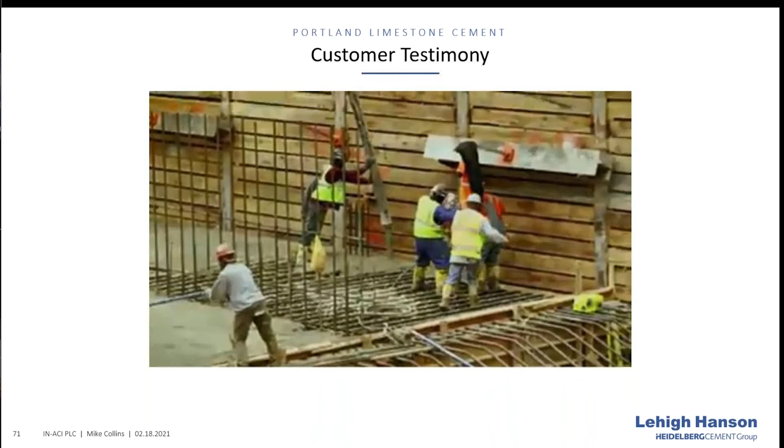When you're delivering concrete to professional cement finishers and mechanics, there's no margin for error. Our clients actually see improved strength characteristics in the 24-hour short-term period. It's a lot easier to move, and it just makes the overall finishability and workability a slightly better product. If we can set the foundation from day one, we hope to be able to build buildings 100% environmentally friendly. And we're really happy to bring new products and new ideas to help fuel the never-ending growth here in Philadelphia.

Okay, pretty awesome story that Castor is a part of, and they allowed us to use this material. I just love this as a closing statement: 'At Castor Materials, our mission is to expand and develop the ready-mix industry and take ourselves and our customers to the next level. EcoCemPLC Portland Limestone Cement reduces carbon emissions while requiring no change to current operational practices of concrete construction. Doing the right thing just got a whole lot easier.'

And so with that, I'm done with the slide part. I hope there are some questions that we can kick around and discuss.